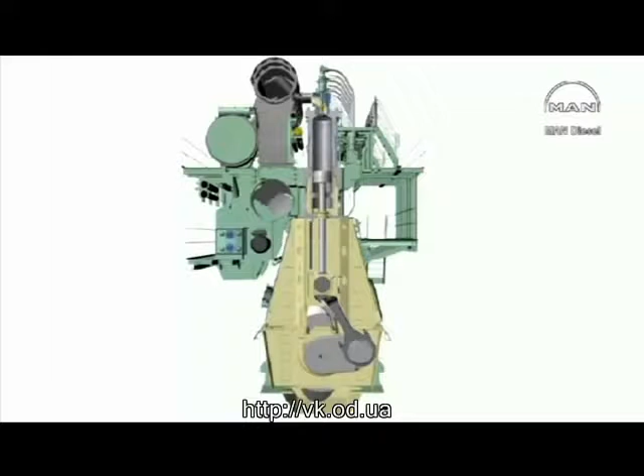The power developed by an engine depends on the pressure sequence in the cylinder. The output of an engine is dependent on the relation between pressure and volume in the cylinder during compression, combustion, and expansion.

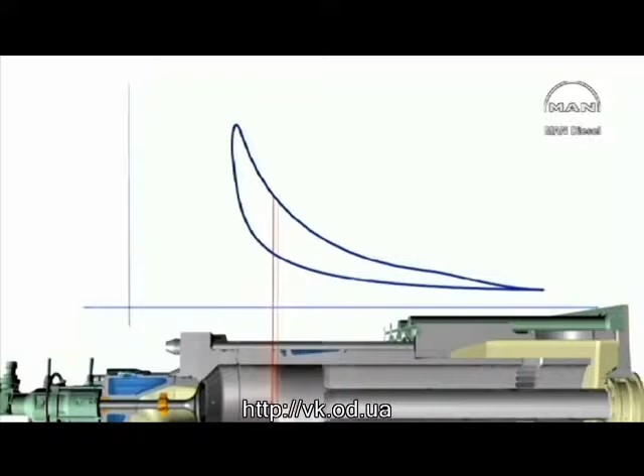For each separate cylinder, the gas process could be described by a curve, the so-called PV diagram or indicator diagram. The diagram shows that the pressure is almost equal to the scavenge air pressure when the scavenge ports are uncovered. The exhaust valve and scavenge ports are then closed, the air is compressed, and when the fuel is injected and ignited, the pressure will rise rapidly and remain at maximum during continued injection. After injection, the pressure in the cylinder falls to exhaust pressure and, during the exhaust period, to scavenge air pressure.

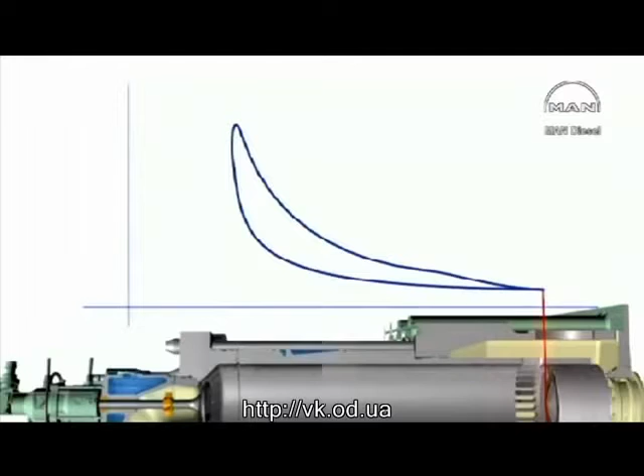Scavenging, compression, combustion, expansion, exhaust, and back to scavenging.

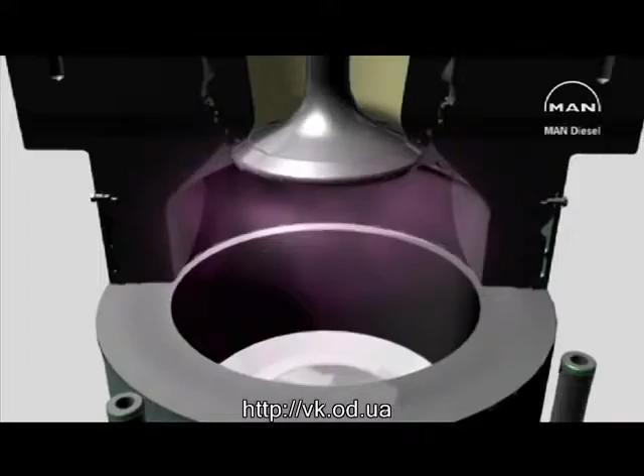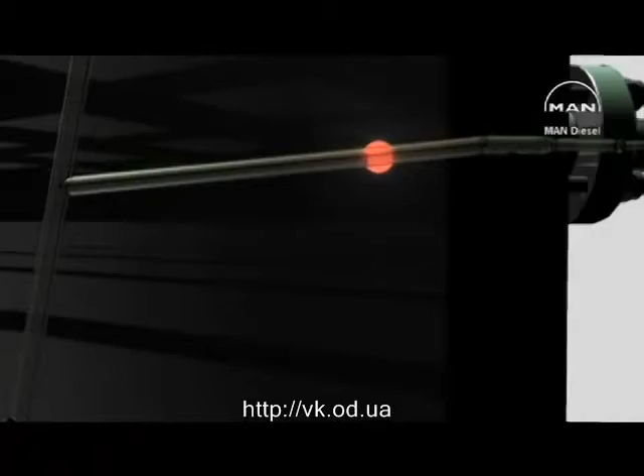The power developed by an engine depends on the pressure events in the cylinder. The pressure events can be recorded by means of an indicator connected to an outlet from the combustion space.

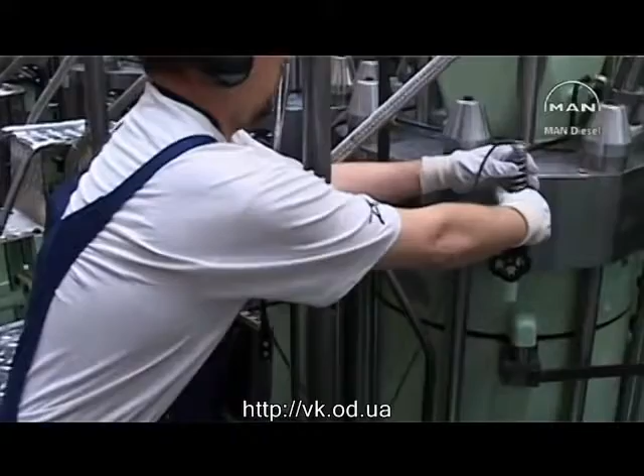The combustion chamber pressures can be measured by a PMI system supplied from MAN Diesel. The PMI system replaces the traditional indicator and indicator drive.

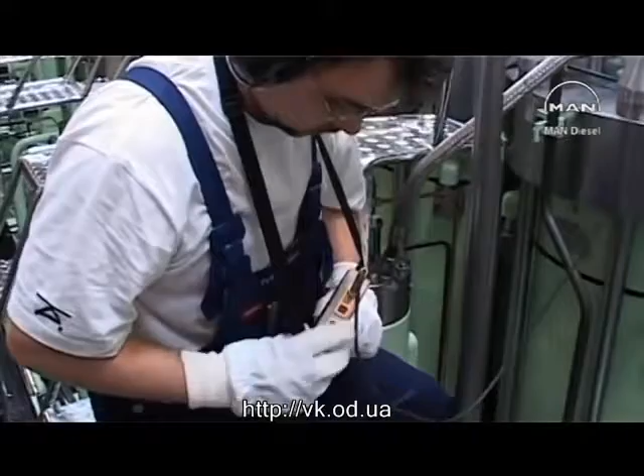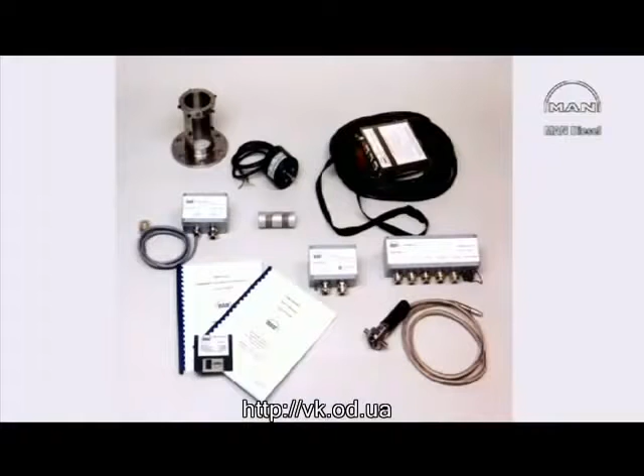The PMI system allows the engine operator, through high qualitative data collection, to further refine the performance and reliability of the diesel engine. Essentially, the PMI system ensures that the load and balance of cylinders is kept within predefined limits with regards to their mean indicated and maximum combustion pressure.

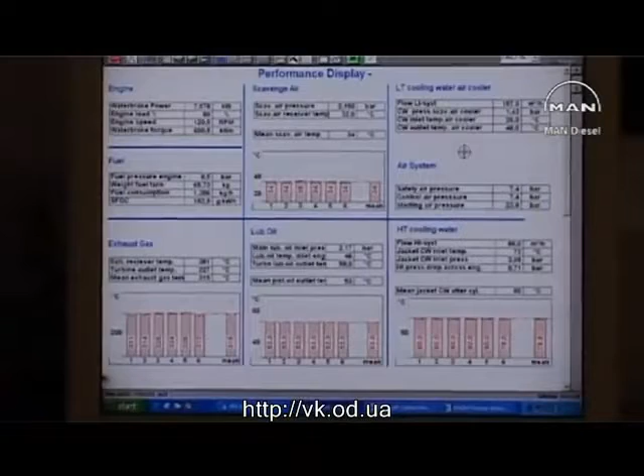The PMI system is designed to produce reliable calculation of mean indicated cylinder pressure and other performance data that require the accurate pressure measurement of cylinder pressures and detection of the crankshaft position.

From the indicator diagram, the so-called indicated output can now be computed. At any given piston position during the compression stroke, there's a certain pressure, P, acting on the piston top.

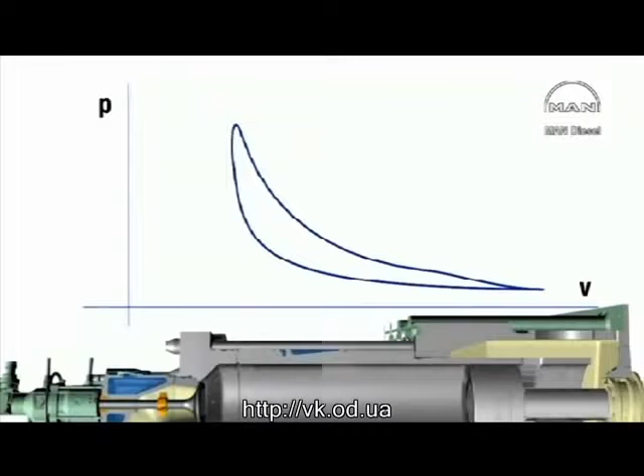If the piston travels a short distance further, corresponding to delta V, and if we ignore the minimal change in pressure, the amount of work done, delta A, will be given by the pressure multiplied by the change in volume, or P times the area below the part of the compression line corresponding to delta V, and the same applies to every single part of the compression curve.

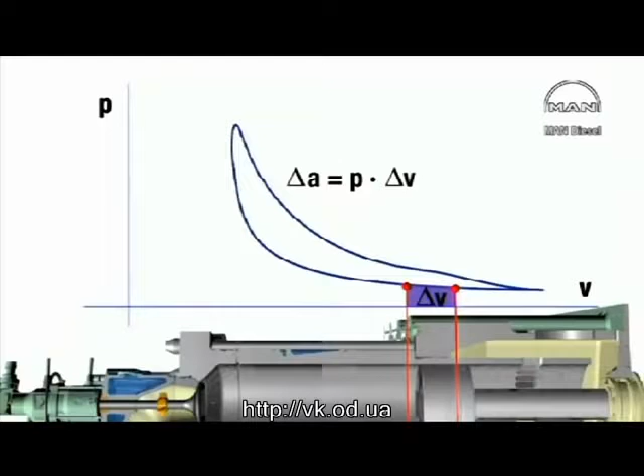That's to say that the whole area below the compression line represents all the work that the piston must perform to compress the air in the cylinder.

During the expansion, the piston pressure acts in the same direction as the piston's moving, so the piston receives an amount of work. It can be seen in the same manner as before, that the amount of work received is represented by the area below the expansion curve.

The amount of work transmitted to the piston during a full engine revolution must therefore be the difference between that delivered during the compression and that received during the expansion.